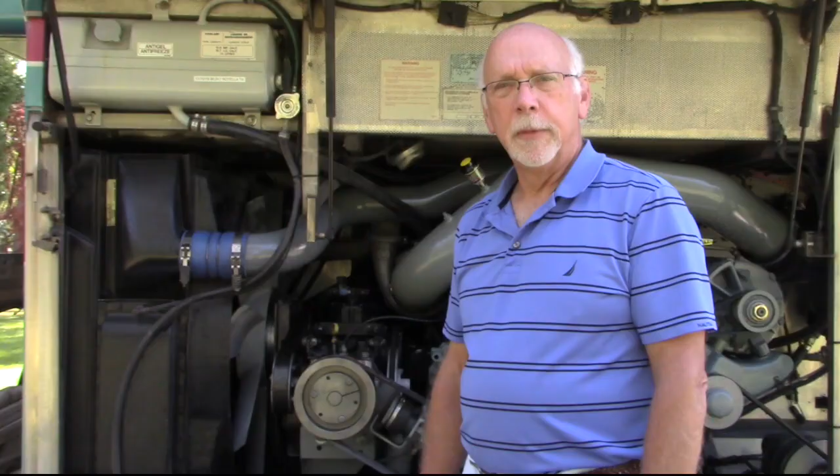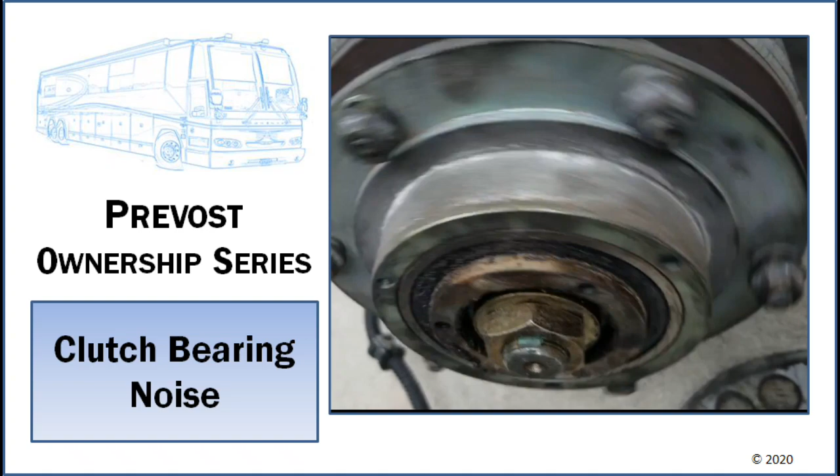Our fan clutch resides right back here between the fan and the fan belt. We'll go into that in a little bit more depth. I don't know if you can hear this, but I'll spin it and you can see what it sounds like. It shouldn't make any noise at all.

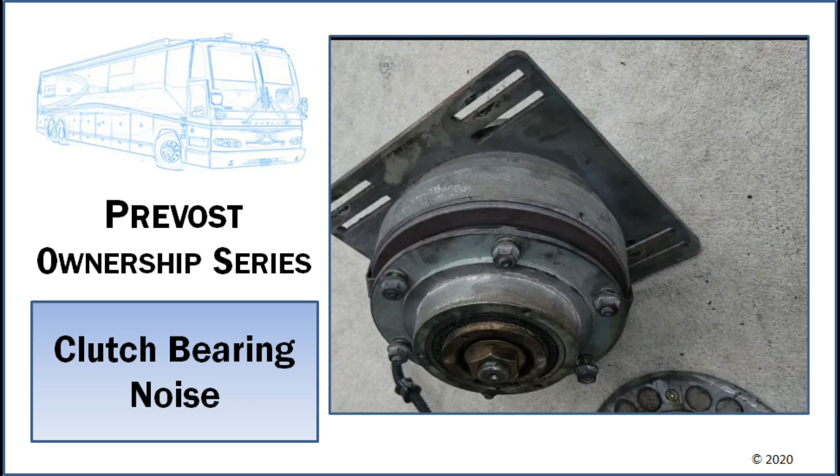Now, hey, you could probably run it on that for a while, but I will tell you that if you ever had a detailed mechanical inspection done at Prevost, they would red flag that as a clutch that needs to be replaced. All right, let's take a look at the major components of the Linnig 3-speed fan clutch. They're illustrated, you'll see all of them, but let's look at them in a little bit more detail.

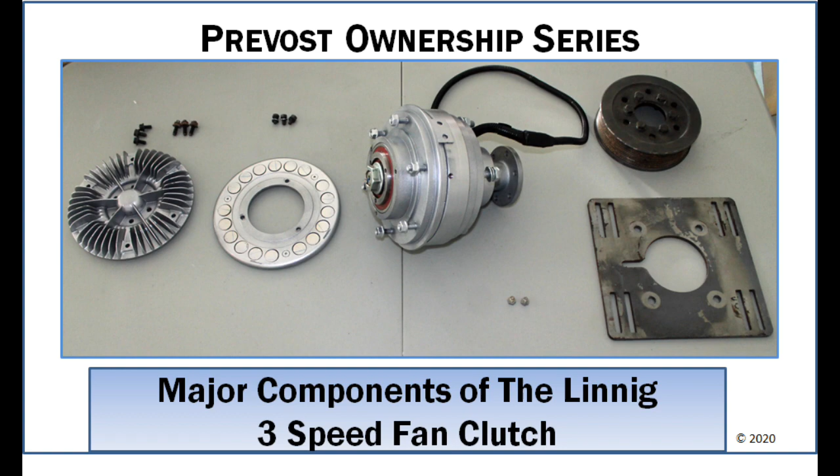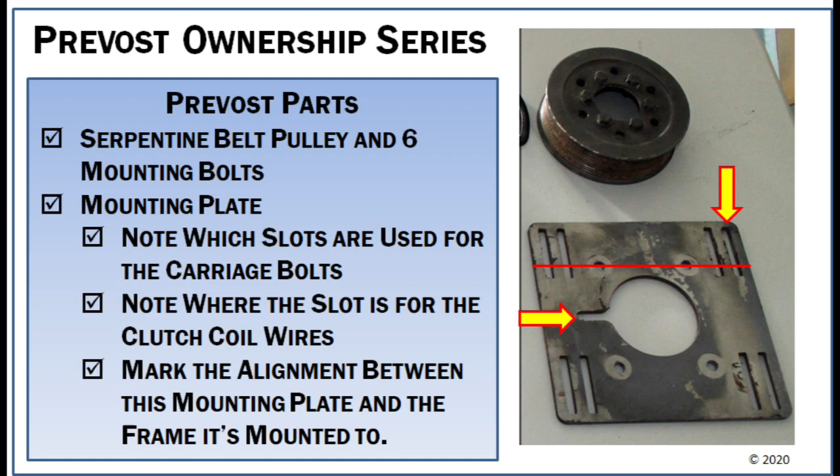So on the far right of that illustration, you'll see the Prevost parts. Here we have Prevost's serpentine pulley and the mounting adapter that goes between the clutch and the support assembly for the clutch. When you take this off, there's a couple things you want to do. One of them is you want to make sure you understand which one of those elongated slots has the carriage bolts that attach this bracket between the Prevost support assembly and the clutch. If you use the wrong slots, you will not have the fan centered in the fan shroud.

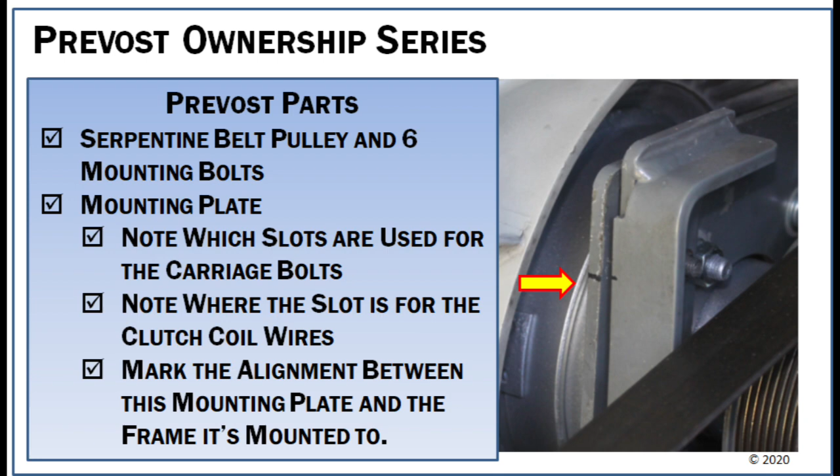And the other thing that you want to do is to make sure before you disassemble this that you take a Sharpie marker or some other marking device and put a horizontal line between the mounting plate and the support bracket. Here you can see illustrated that mark that shows the horizontal alignment. This will certainly help you out when you go to reassemble this to make sure that the fan remains centered in the fan shroud.

This is not a go to your store and pick it up kind of bearing. It's a German-made product, double bearing, and that center piece of it actually is tapped to support the outer mechanism that actually locks this clutch. So in my research trying to find one of these bearings, I could only find it available in 2 locations, Poland and Russia. So in my case, I actually opted to get a remanufactured clutch.

The next thing we're going to see here is the coil packs. There's 2 coil packs in this, one for low speed and one for high speed. So anyway, that's where the coil packs are. And then on the very end, that's where the pulley is going to mount to.

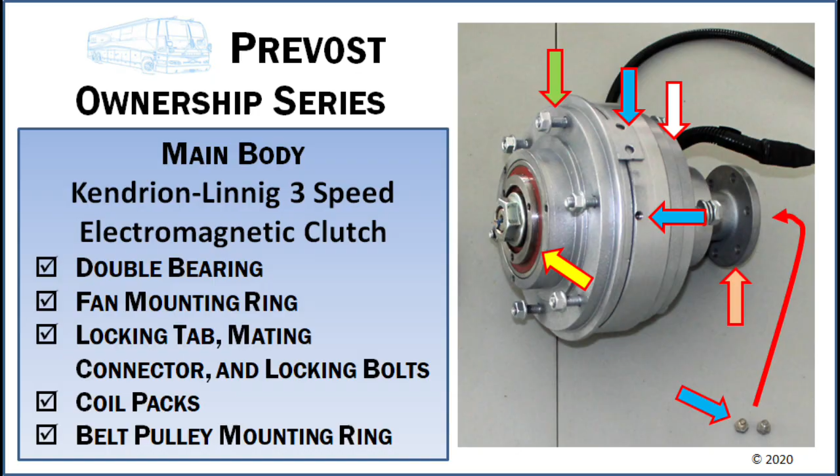The items closest to the radiator that are put on after the fan when this is assembled, or the first things that come off on disassembly: there on the right-hand side is a plate that has a bunch of earth magnets. That's held on with 3 bolts with lock washers. And then the piece on the far outside that has some cooling fins on it, that's a frictionless plate that'll actually, through those coils, allow that fan to spin, or on one of the coils will actually allow it to lock to that magnetic plate.

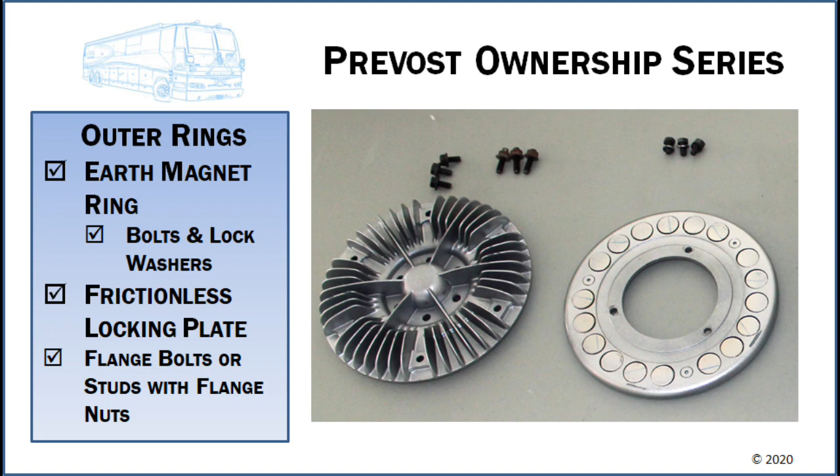That's put on with either 3 nuts and studs or 3 bolts. Of course, if you order this from Prevost, it's going to come correctly, and that will be nuts and studs. To try to put this on with the bolts would be impossible because there would be no way to line that up when you're assembling this. So make sure that if you do get a rebuilt, that it has the studs and nuts, not the bolts.

This is what it looks like when we're getting ready to put this back in, which obviously would have been the opposite way when we took it apart. But our charge air cooler pipe has been removed. Our air filter pipe has been removed. All of those openings have been covered.

And you can see those with the red arrows pointing up where I actually duct taped the charge air cooler and the turbo inlets. You don't have to do it, but why not? And then you want to make sure that you protect the radiator because you're going to set the fan on the radiator. So you can do that with stiff cardboard, in this case a thin piece of plywood.

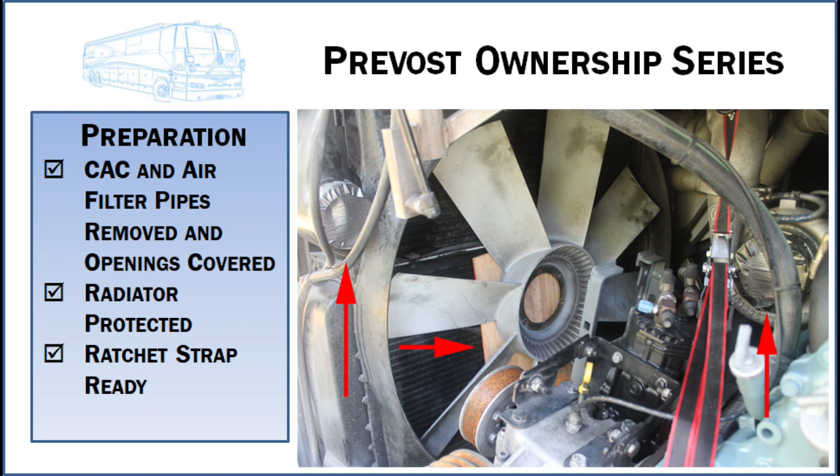And you should put a ratchet strap in there because when you're taking it out or putting it back in, it's kind of heavy. So that's the first part of our preparation work, to put this back in.

Another look at this, you'll see that we have removed the airbag support that was bolted to the motor. And all you have to do is take the 3 bolts out that attach it to the motor, and you can just let it swing or rest in place. I physically removed it because I was painting the engine at the same time.

And then you'll want to take a strap, and you can see that strap depicted by that lowest arrow, and you want to force the entire support assembly off to the right hand side to give you maximum room to work putting the clutch on and off in the fan assembly. And I put a strap on it just to make sure that it doesn't inadvertently swing over towards the radiator.

And here you can see the ratchet strap sitting there. That's the black and red stripe strap ready for assembly. And what holds that up is I've got a board that's sitting on top of the radiator, and then over on top of the valve cover you'll see that small piece of wood depicted with the arrow on the upper right hand side, just to keep the piece of wood up off of that radiator line. You probably don't have to do that, but kind of why not, right?

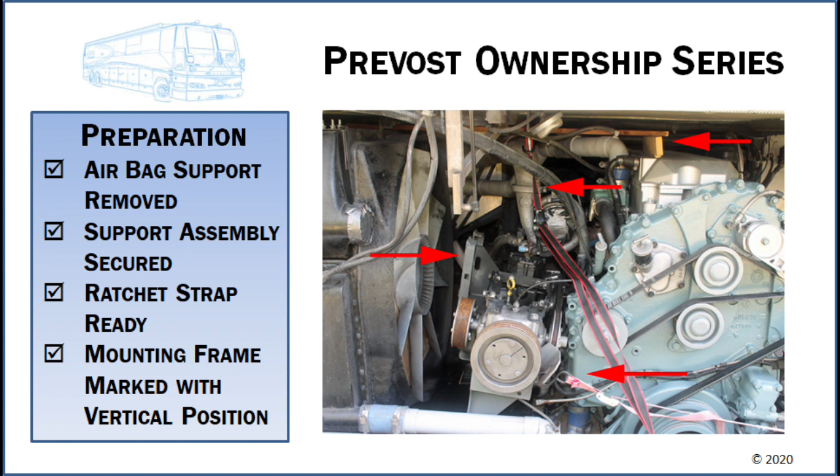If you didn't mark your alignment on the support bracket and the attachment plate, you want to make sure that you do that now before you put it together. So at this point, everything is ready to put the fan clutch back into place. So as I said earlier, this thing is heavy. It's 50 pounds. Although you can lift it up and put it over the support bracket, trying to get everything aligned, it's just so much easier to use a ratchet strap.

So when you put that strap on there, you want to try to avoid putting the strap across the locking tabs, only from the standpoint that if the tabs actually get bent inward, they may drag a little bit and may be a little difficult to pull those back off. So just avoid doing that.

You'll also want to make sure that the coil wiring is protected. When you're putting that in there and aligning it, make sure that that coil wiring does not get pinched on anything. It's as simple as taking the ratchet straps and moving the assembly up to align with where those horizontal alignment lines were put on prior to removing the clutch.

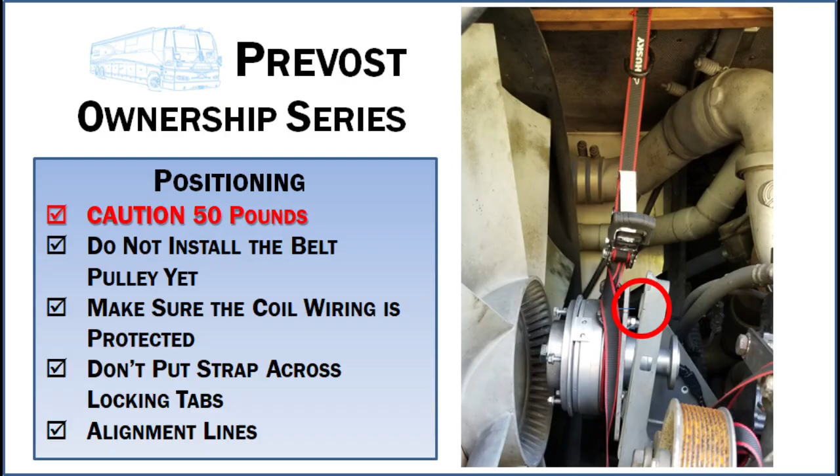At this point, we've already put the 4 carriage bolts in place after we've aligned those tabs. And those 4 carriage bolts are there, and now we're going to take the fan and set it back on top of the clutch assembly and then put those nuts on.

At this point, don't remove the radiator protection because we still have 2 other pieces to put on, but this might be a good time to make sure that you did use the correct 2 elongated slots rather than the other 2. So if you like, you could take the strap off that's holding the support assembly off to the right and loosen that up and make sure that the fan goes into the shroud and doesn't hit it. You don't have to do it at this point, but if you've made a mistake on the 4 elongated bolts, this is the time to know that.

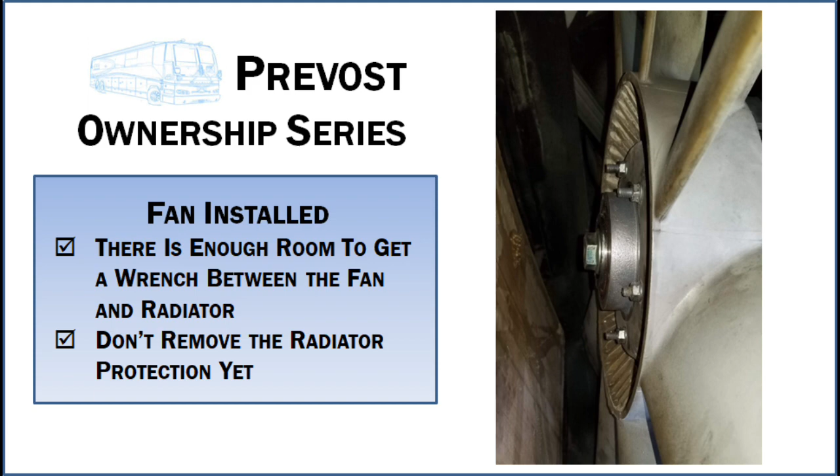So we've got the fan all bolted down to the assembly. That's all pretty easy to do. And the next thing is that we'll put on those 2 other pieces that we showed earlier. The plate that has the earth magnets in it will be bolted down with its 3 bolts, and then you'll insert the studs so that you've got a way to align that final piece and just slide it over the studs. Once it's over the studs, it'll lock into that magnetic plate, and then tighten those 3 nuts down, and you're done.

So now at this point, we'll want to make sure that we have the fan belts in place before we do anything else, because we want to make sure that we're not going to damage the radiator. So we got the fan belts on. We've reattached the assembly that has the airbag on it for tensioning.

We'll go into this on a different video, but you'll want to make sure that the support bracket and the airbag support are all aligned to specifications. But right now, assuming you didn't remove anything other than the 3 bolts holding it onto the engine, you should be able to put it right back. If you did not put that horizontal line to show you where that fan should be, while you're checking the fan, you want to make sure that the fan is centered in that shroud.

Don't assume the length of all of those blades are the same. They, in my case, were not. They varied by up to 1/4 of an inch. So when you're doing your checks, and I just use a micrometer to go in there and check the far right, far left, far up, far down, and make sure that they're all relatively the same. Do that with the same fan blade.

Okay, the next thing to do is some testing. Now that we've got the assembly on there with the belts on, the bag adjustment assembly in place, we have now physically tried to push the fan support assembly as far as we can to the left to try to push the fan into the radiator, making sure that at this point there's no way that that fan can hit the radiator. Once we've done that, it's time to air the system up, start the engine, and make sure this works.

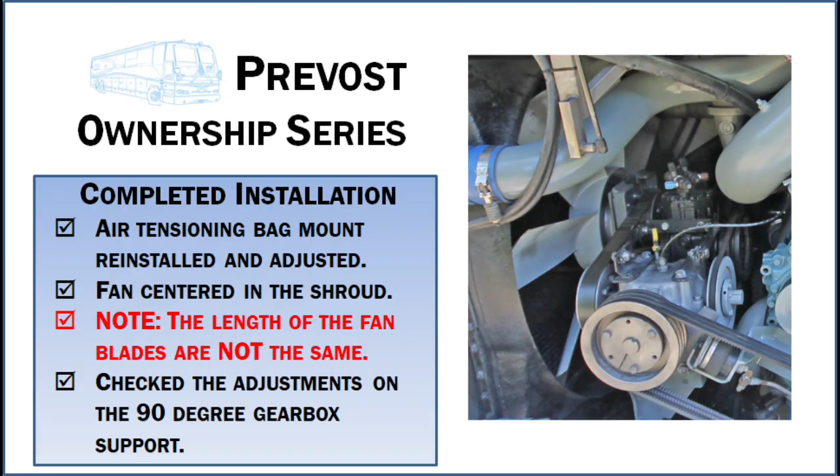Before we start the engine, the next thing we want to do is to make sure the fan clutch physically works. We've got the wires in place, we've put all the restraints on, we're ready to test this. So we'll turn the ignition on. We will not start the engine. We'll turn the ignition on, and then we'll use a test relay. All we do making a test relay is to take an old relay. It doesn't have to be 24 volts. A 12 volt one will be fine because the voltage sensitive part of this we're going to remove.

And the two drawings there on the bottom show electrically and physically what that fan clutch relay looks like. And all you're going to want to do is break off the 2 tabs, 85 and 86, which would have energized the coil. Breaking those off is simple with a pair of pliers or needle nose, anything like that. And the 2 that you're going to break off, like I said, they're numbered 85 and 86. But if for some reason you can't read the numbering on the bottom, it's the 2 outer ones that are parallel to each other.

So with the ignition on and the relay in the low speed, speed 1 slot, you should feel some resistance when you're holding the pulley that the fan belt is on and turning the fan itself. You should notice some resistance when you're in the low speed, speed 1 relay position with this test relay. Then you take the test relay and you move it over to fan speed 2, which is the high speed one. And at this point, when you try to move the fan while holding the belt pulley, it should be locked. It should not move.

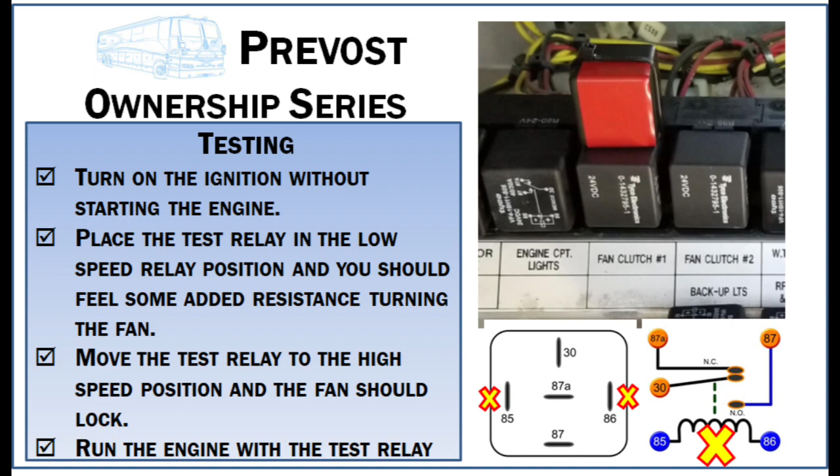And then there's a few converters that for a short period of time were putting one of their alternators on top of the support assembly above where the 90-degree gearbox is. For those, it may be extremely difficult to get that fan clutch out. It may require taking that alternator out of its place to do that. As you can see, it wasn't that difficult to change the fan clutch.